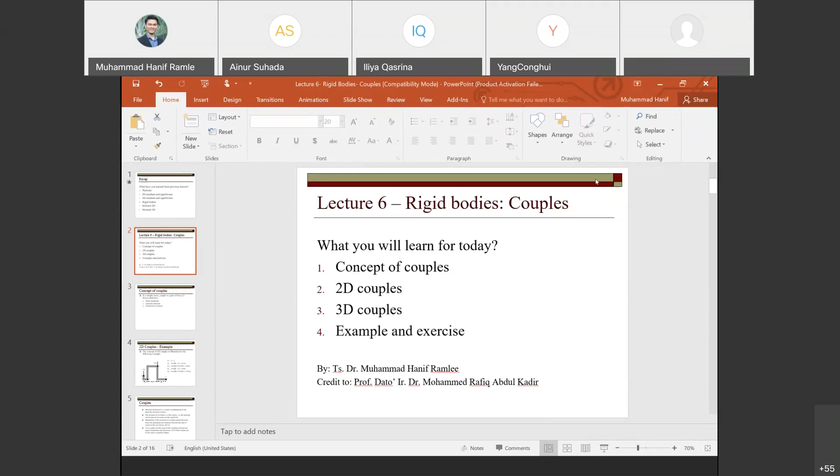Okay, right. Okay, Bismillah. So how was your test actually?

Testing. Alhamdulillah, doctor, it was good. Oh okay, only Hussein good. How about others? Easy? Easy, right? Yes, doctor, thank you.

Okay, so I think you can score 100% for test one. Is it? Can you solve, doctor? Inshallah. Okay. Inshallah.

Wong King Tong says he cannot solve the last question. Okay, alright, never mind. I will explain why I put question 4 later on after I mark your test 1. So once the mark is ready, I will pass it to you, and then I will explain why I put question number 4. Let me check.

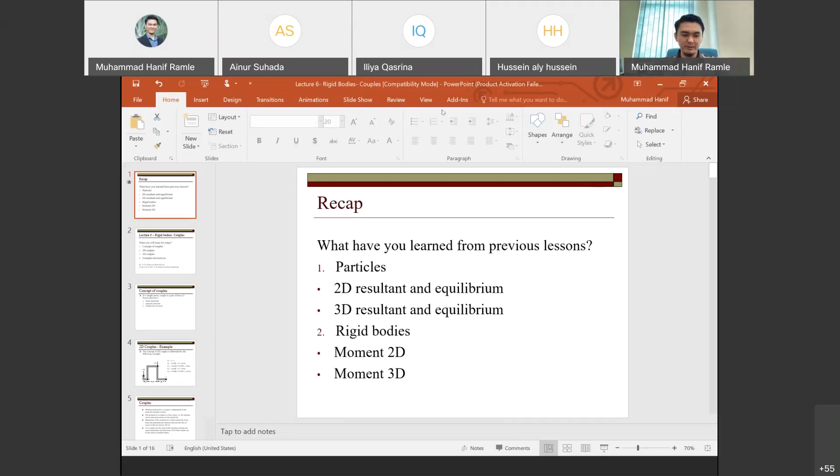Okay, all right, so let's start with the lecture. Just want to know what you have learned from the previous lecture. So maybe before we start the new topic, I just want to know what you have learned from the previous lesson, from the previous lecture. So actually, what have you learned?

The 2D and 3D equilibrium. Okay, all right, any more? Moment of particles. Okay, any more?

Any more? What have you learned, guys? 3D moment, and we take some examples, we solved some examples. Difference between a particle and a rigid body.

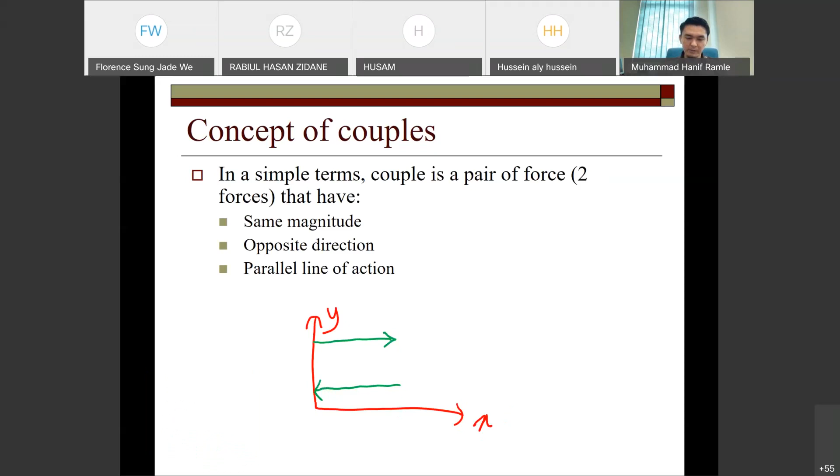Okay, if you have two forces that have the same magnitude, let's say 10 Newton here, 10 Newton here, opposite direction to each other, the upper one going right, the below one going left, which is opposite direction, and parallel, both of them are parallel. This is the system that having couples, the system having couples.

So let's say we do have these forces, one is like this, say 20 Newton, and another one like this, 20 Newton. Is this considered as a couple? No. Okay, great, very simple, right? Very simple.

All right, why do we learn couple? Later on, if you go through a lot of examples, you will know why we learn couple. Basically what I want to tell you is the use of couple is that you can calculate moment about any point that you like, because the calculation, the final answer will be the same.

Let's say you want to calculate a moment about point A, for example. Then you calculate using the formula, you will get the answer like shown here, 400 Newton meter. Let's say you want to calculate moment about point B, you calculate using the normal formula, you will get the same answer. And then you calculate a moment about point C, you will get the same answer. And the last one, moment about point D, you will get the same answer. So the thing that we learn about couple is just to show you, any point that you calculate for moment, the answer will be the same if the system has a couple.

If the system has two forces that have different direction, same magnitude, but in parallel, and parallel position, right? So if you want to try, you can try now.

To calculate a moment, for example, about this point A. If you choose point A, you will only consider this force in your calculation. Let's say clockwise is positive. So it will be equal to 100, distance is 4, equal to 400 Newton meter. So this other force we're not considering if you choose point A.

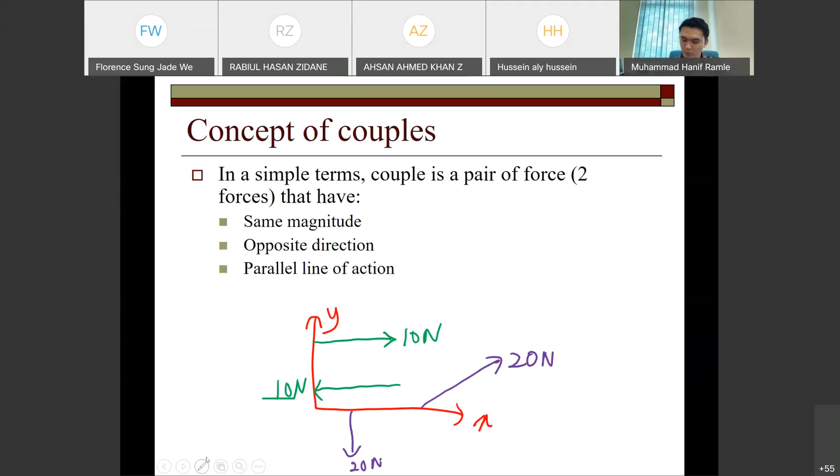So far any question? Why for MB we added, but MD we subtracted? You cannot simplify and just put sign positive or negative like that. You have to understand how to get the answer, how to get the solution. Never mind, I can explain to you. It is all.

Let's say you want to calculate a moment about point B. We go one by one. We take this point, and of course we have to simplify the equation. We have to assume the first direction - I assume the positive one should be clockwise, like this. So any force that follows this assumption will be in positive direction. We have the first one, which is this force, 100 times 1, and then plus another force, which is here, 100, distance is 3, and we will get the answer.

So if you go to point C, we only consider one force because the C point has another force, 100 Newton, so there is no distance at all. So we can consider the moment for this force is equal to 0. So for point C, again, assumption positive should be clockwise, equal to 100 times distance. You will get 400 Newton meter as well.

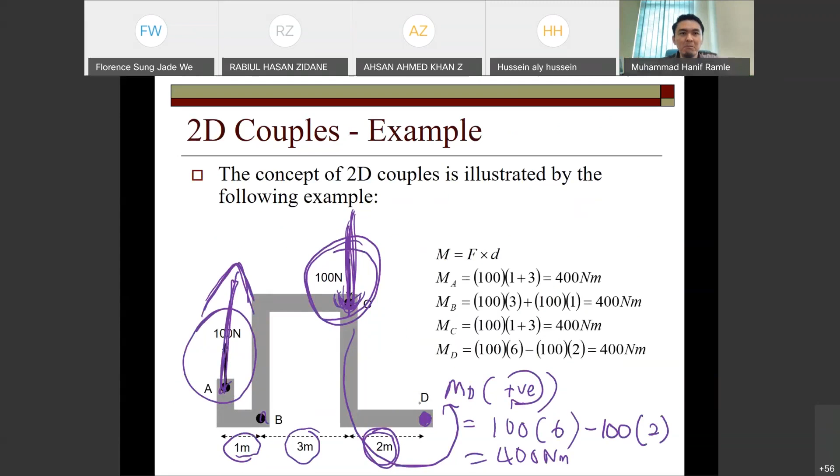If you have a couple, it is independent. No matter where you choose the point A, B, C, D, the moment will be the same forever and ever. So this is the meaning of the first statement.

So number two, the moment of a couple is a free vector, i.e. the moment can be placed anywhere on the rigid body. Do you understand what is the meaning of this statement?

Anyone? Come on, guys. Tak sarap lagi eh? Ke tak sahur? Anyone? It's similar to the principle of transmissibility. No. No. No. Anyone? No idea.

Okay, so the meaning of this statement is actually, the moment that you calculate just now, let's say 400 Newton meter, can be placed anywhere on the rigid body. 400 Newton meter can be placed at any point that you like. If it is a free vector, it's not only the point.

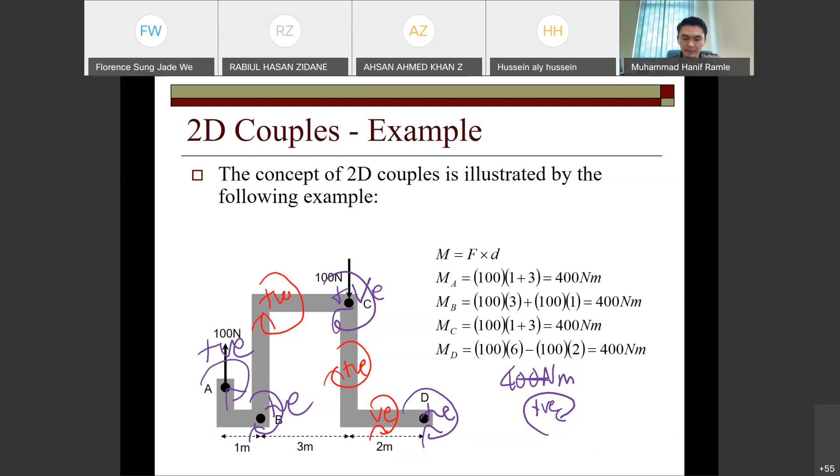Okay, so this is the meaning of the second statement. The moment of a couple is a free vector, where the moment can be placed anywhere on the rigid body.

Okay, so number 3, the magnitude of the moment of the couple equals the force times the perpendicular distance between the line of action of the two forces. As you know, we have this equation, M equal to F times D. The magnitude of the moment of a couple actually follows this equation.

And then number 4, two couples are the same if the resulting moments are of equal magnitude and direction, and both couples are on the same or parallel planes. So the last statement, do you understand? Yes, doctor. Okay, can you explain to everyone?

Who said yes just now? Rabiul. Rabiul Hassan, did you say yes? Yes, doctor. Can you explain your understanding of that statement? No, doctor. Sorry. I understand, but I cannot explain. Okay, all right.

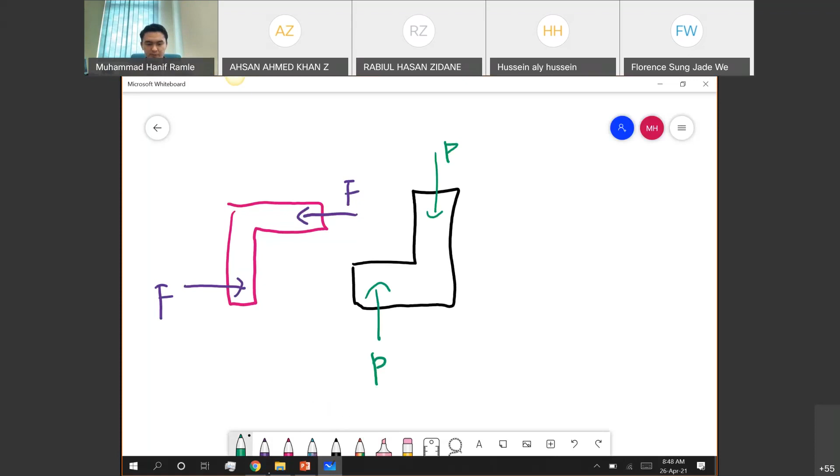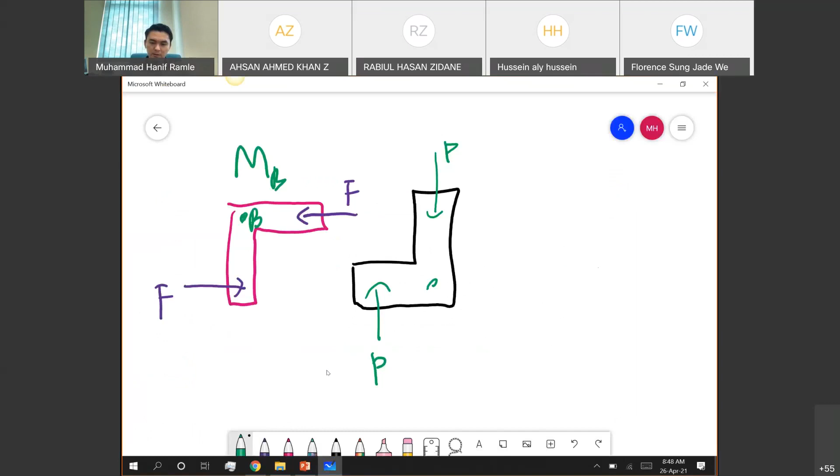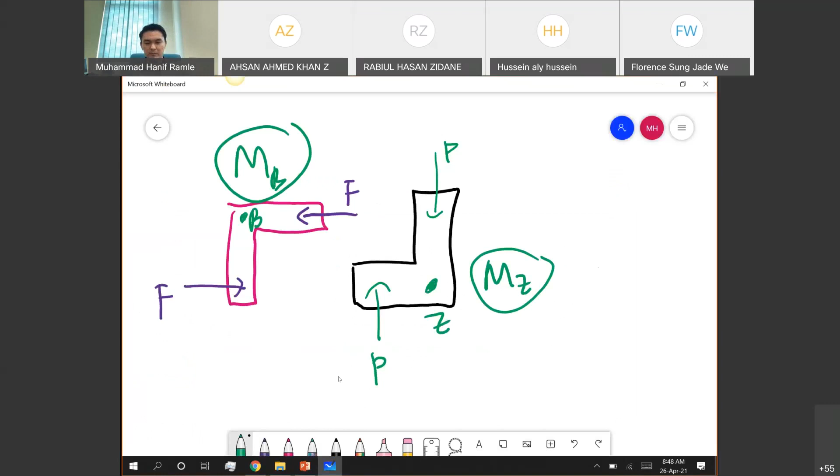So if you have this system, 2 different rigid bodies with 4 forces, you will find that the 2 couples having moment are the same. So the moment about this point B, and say a point Z, the moment about point Z, will be the same. These 2 will be the same. The 2 couples are the same if the resultant moments are equal.

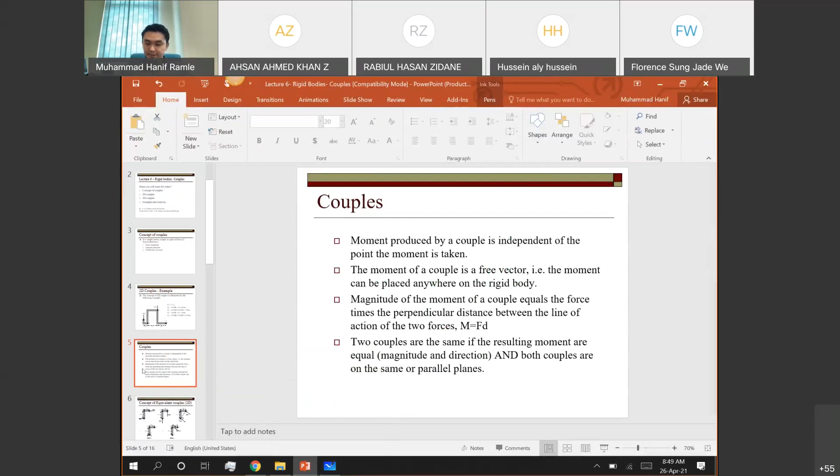So let's proceed to the next one. Concept of equivalent couples in 2D. You can transform the forces into a different direction, into a different magnitude, like this. Let's say the original is here, and you want to solve a problem without this kind of direction. You can transform this direction into this one. How to transform?

The first thing you have to calculate is the moment, of course, about any point you like. Let's say I take moment about C, the easiest one. You will get straight away negative 90 times 3, which is negative 270 Newton meter about point C. So once you have this moment, 270 Newton meter, you can transform the forces into a different direction as shown here.

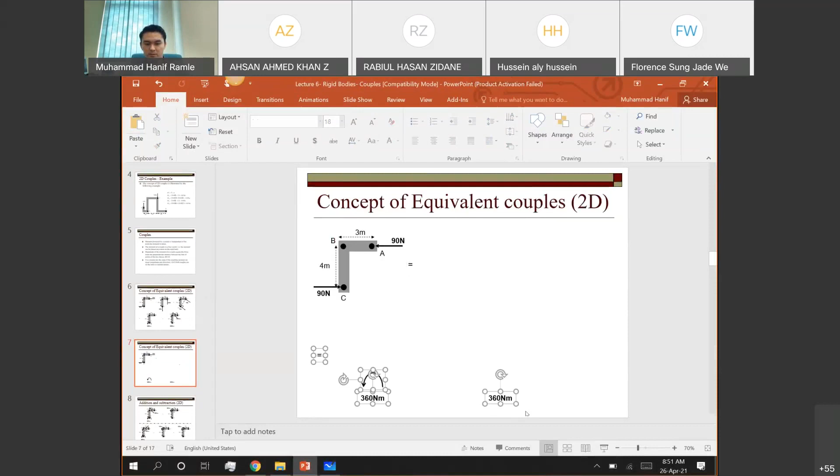How to transform? Any idea? Anyone? How to transform? Someone? Come on, guys.

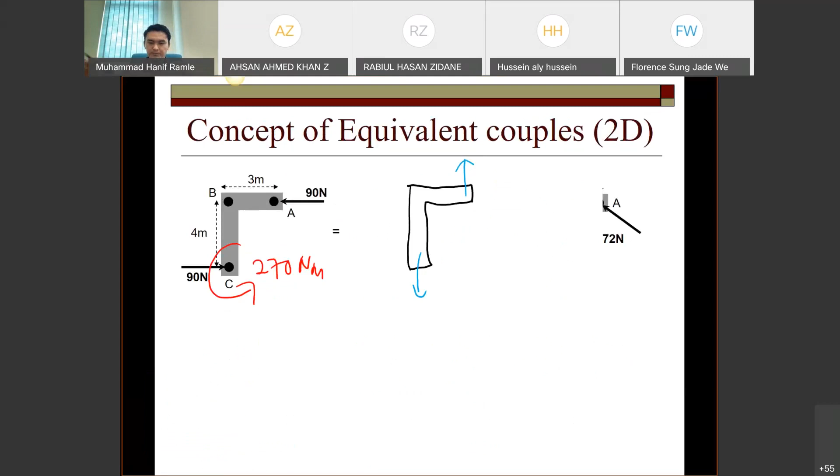One condition is sure, that we should get a resultant of 270 Newton. At point C, if we change the force, we should still get 270. That is one condition, I think. I'm not sure, but at point C, when we change the force, we should still get the resultant as 270. The resultant or the moment? The moment, sorry. Yeah, correct. So the moment will be the same, but the direction will be different, and also the magnitude.

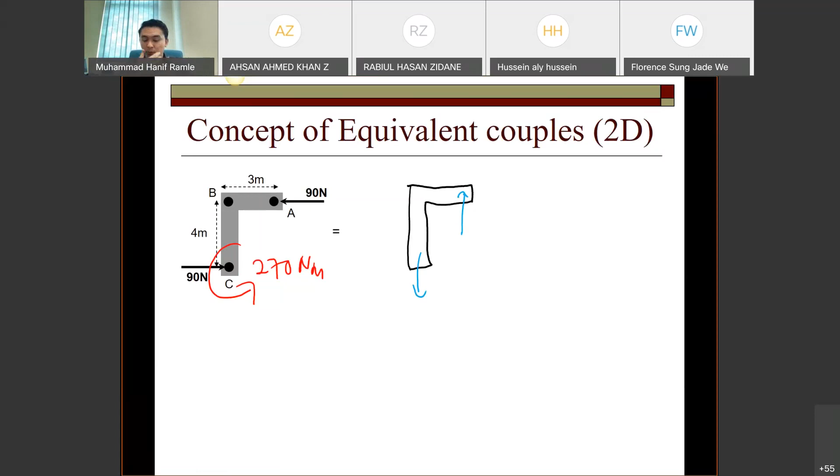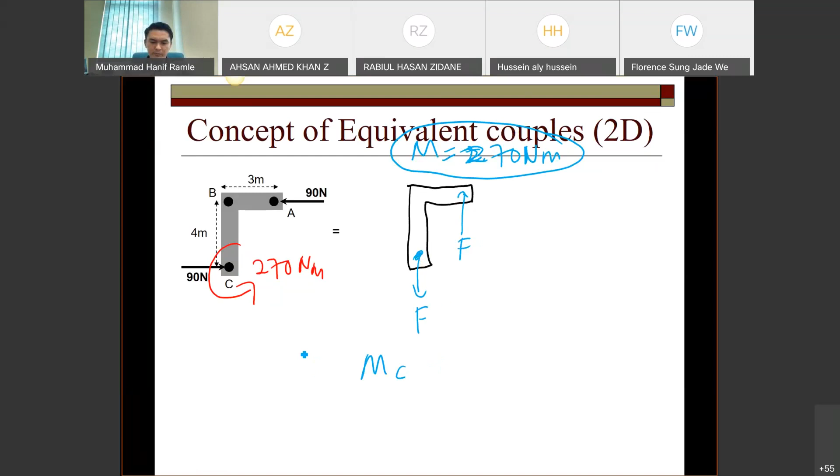If you change the direction like this in the blue arrow, this system has the same moment actually. You can find the forces using this moment. Let's say I call it F. You can find the F value using this moment, using the same point, C. I assume positive is clockwise. So in this situation we have negative F and the distance is 3, and the answer is negative 270. You will get it straight away.

Okay, how much? This one. Again, 90. Same. Negative 90. Oh, sorry. Sorry. This one is a mistake. It should be 270. Right. 360. This one should be 360. Am I right?

Can someone check? Right. Can someone check for me? Guys? We take the distance between B and C, then it should be 360. Okay, great. So the answer for this one should be...

So normally which distance should we take? Like 3 meter or 4 meter at point C? Hey, this moment. Wait, let me explain. Okay.

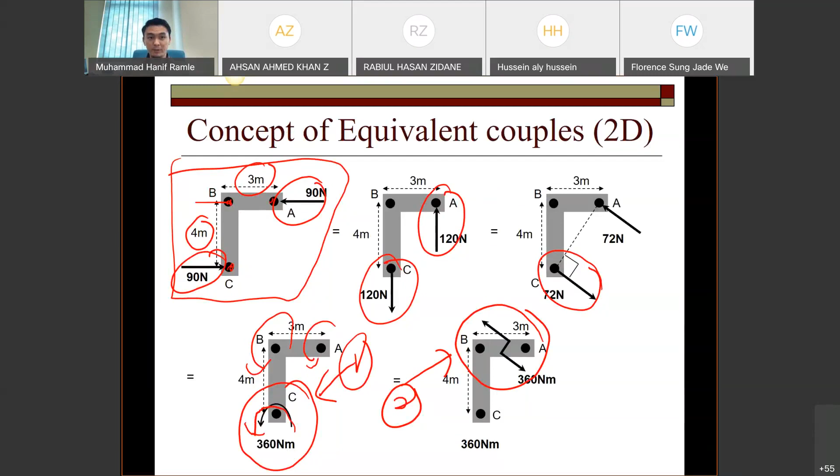So another thing that I want to show is the arrow to illustrate the moment. The first one is this one, the second one is this one. You can illustrate this kind of arrow to show the moment direction. So this arrow, you can put at any point that you like, as we discussed in the previous one. Where is it? Yeah, this one. You can put any point that you like because the moment will be same if you have a couple system. And this example only put it at C point.

Another type of illustration of moment, like this arrow. Yeah. This one if the rigid body having anti-clockwise direction. So if the body having clockwise direction, the illustration of direction should be like this. Right? Sorry. It should be like this. Or it should be like this, of course, if the rigid body is clockwise direction. All right. Any questions so far? Any question?

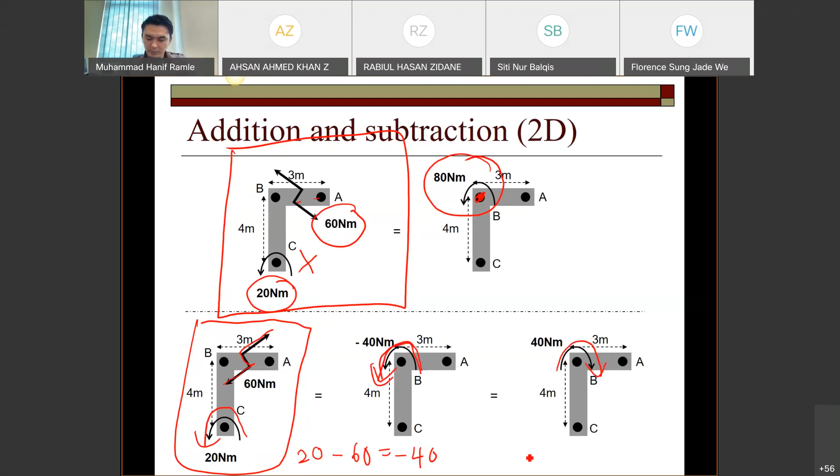So the second example is here. Different direction. The first one is anti-clockwise, which is 20 Newton meter. The second one is 60 Newton meter, but in clockwise direction. So let's say you want to have this direction, you can add or subtract like this: 20 minus 60, so you will get minus 40. Or maybe you want to have the clockwise direction, you can have minus 20 plus 60, so you will get 40 Newton meter.

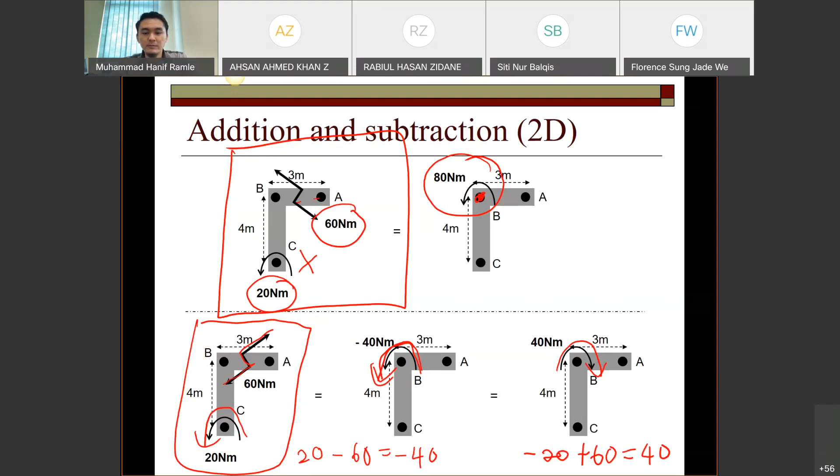Okay, do you get, guys? Easy, right? Yes, doctor.

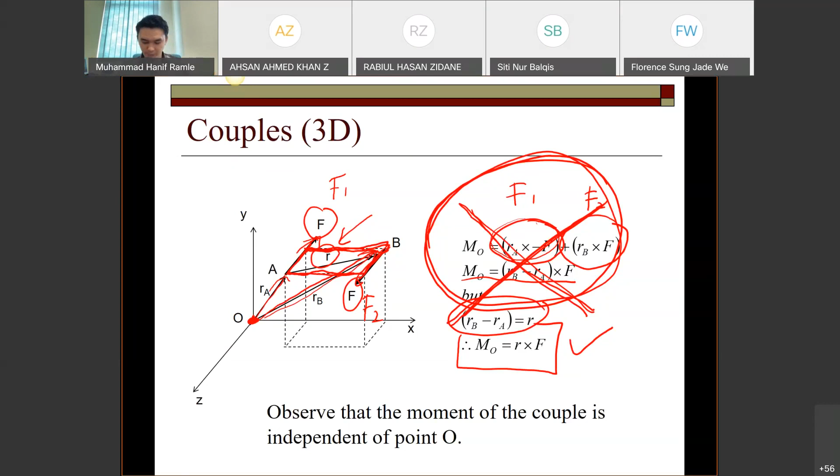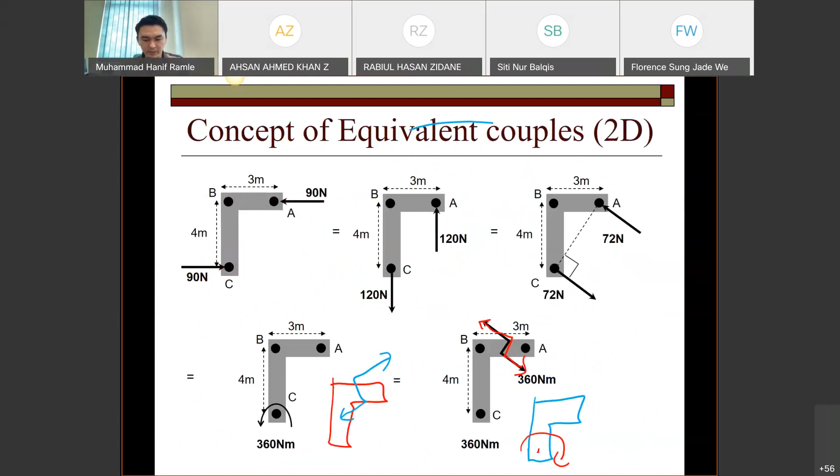Before we proceed to the example, is there any question? Is there any question, guys? Any question? No, doctor. Can I proceed? Yes, doctor. Okay, great. Let's proceed.

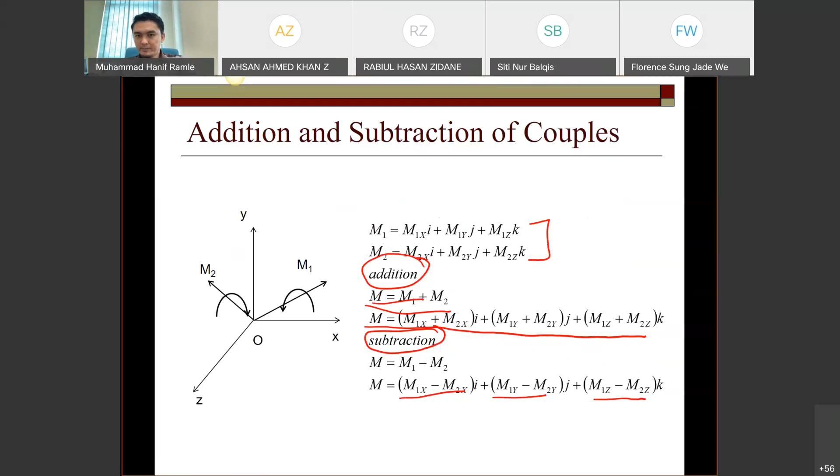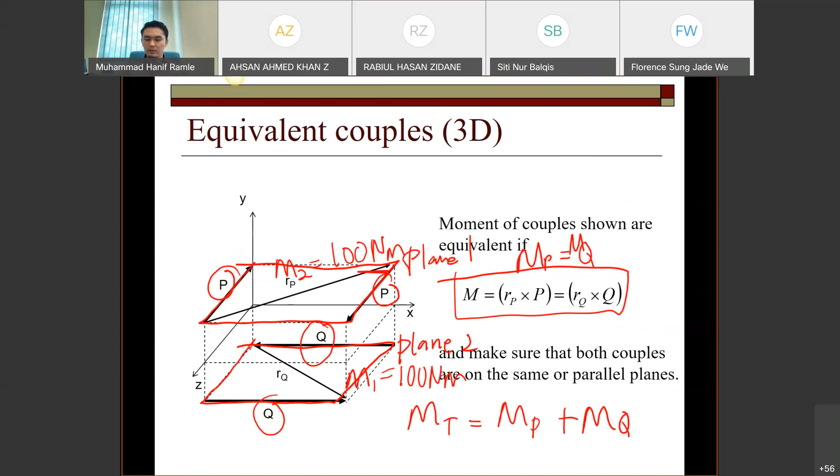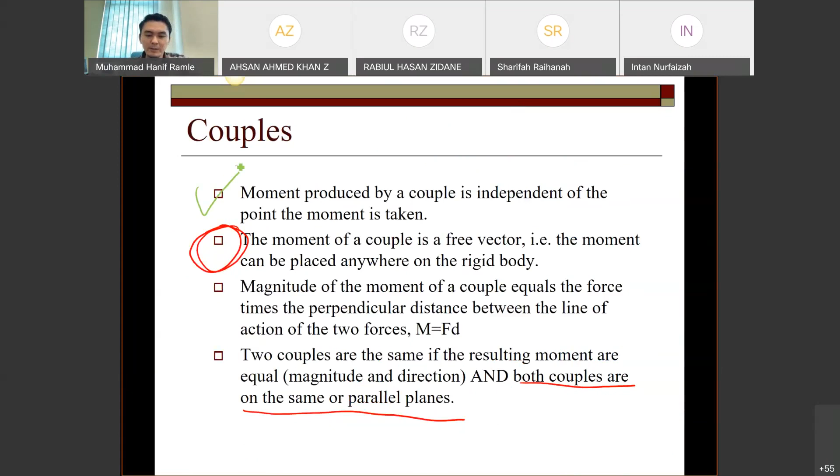So basically, you can take whatever point you like. Let's say here, for example, because the moment at every single point here will be the same. 5.4J will be the same. You can take any point you like, as I mentioned in the previous slide. Okay, this one. The moment of a couple is independent. So you can take any point you like.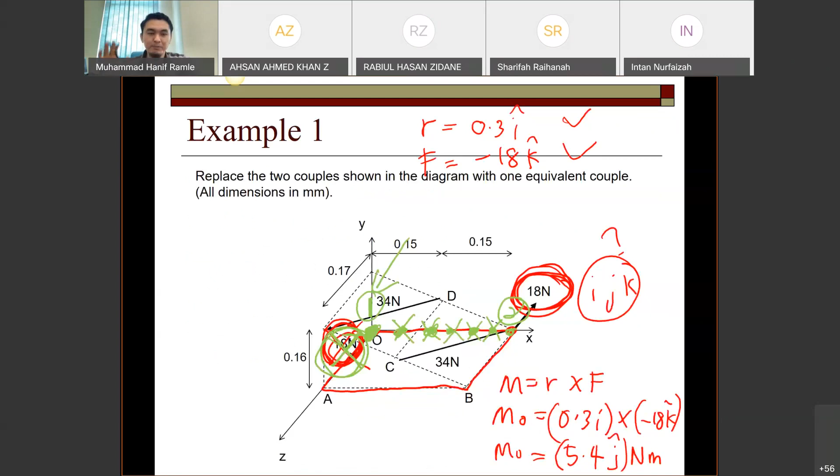D should be perpendicular. From this one, the force is like this, meaning there is no D from the line of action to the point; D is equal to 0. So that's why we can eliminate this force, and we only consider this force in our calculation. All right. So if I choose the second point, let me erase this one.

Okay, if I choose the second point here, point number 2, you can calculate moment as well. Let's say this moment I put it point E. If you choose this point, you will not be considering this force in your calculation. You only have to use this force in your calculation, and the answer will be same as this one.

If you don't trust me, we can try now. So if you calculate moment about this point, point E, R cross F. So F is only this one, in the direction of Z should be positive. F equal to positive 18 K Newton, and the direction should be from E to O.

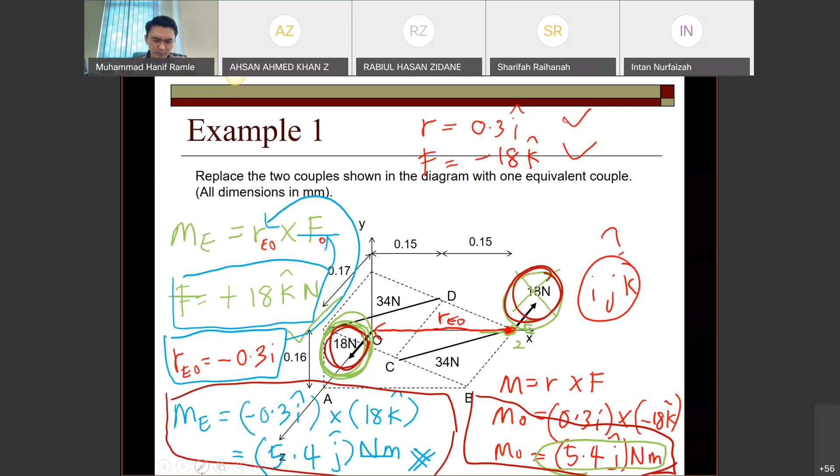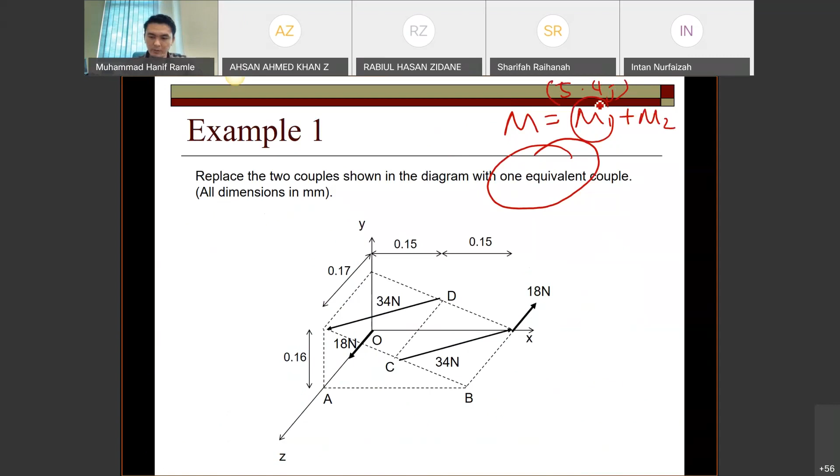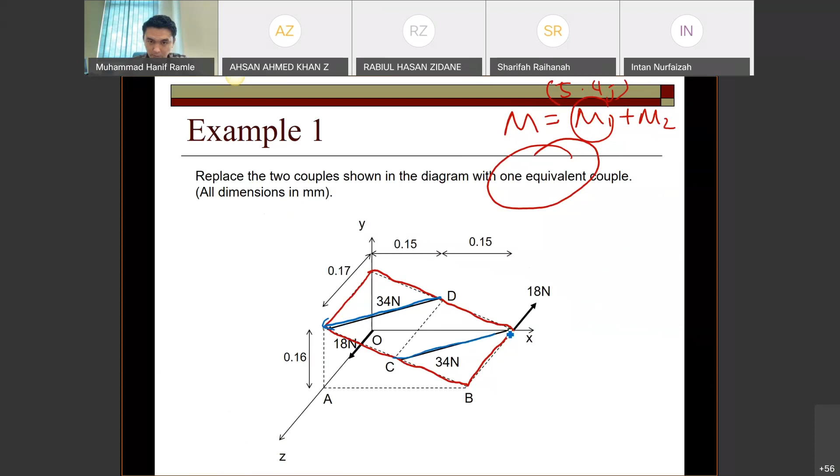Since we have to find the equivalent couple, which is M, so M1 plus M2. M1 just now we get 5.4 J. So moment number 2 is for this plane, and this plane having a force of 34 Newton, from this point to this one. Same goes to this plane, you have to utilize this equation to find a moment.

So how to find a moment? Let me pick one name. Chai Yi Wei, are you still with me? Yes, Chai Wei, can you tell me how to find the moment? Of course, you have to get the R and F. Can you tell everyone?

This one is a bit tricky. Everyone, please prepare the answer, I will ask you also. Chai Wei Yi, which point that you want to calculate moment about?

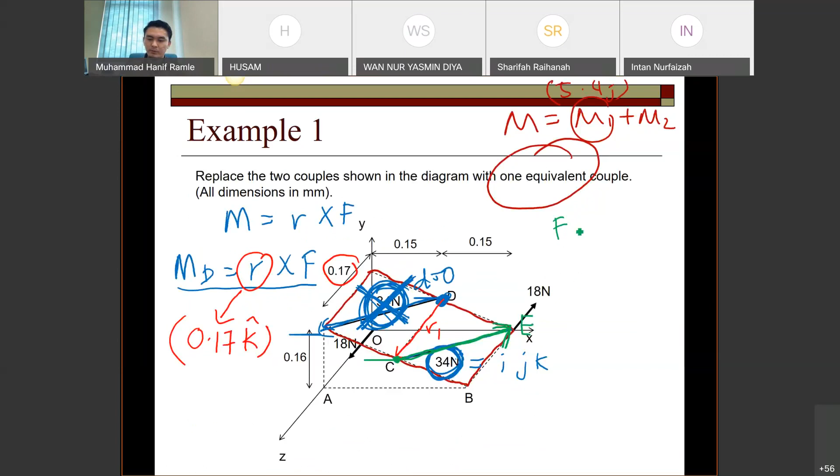The force should be F lambda, where lambda is the direction: dx over d, I, plus dy over d, J, plus dz over d, K. So you have to identify dx, dy, dz, and of course d.

From this case, what is dx? 0.15, 0.15. Negative or positive? Positive, because it's in the right. Correct, 0.15.

Okay, how about dy? Dy positive also - wrong. Dy should be negative. How much dy? Yes, correct, negative 0.08. Okay, how about dz?

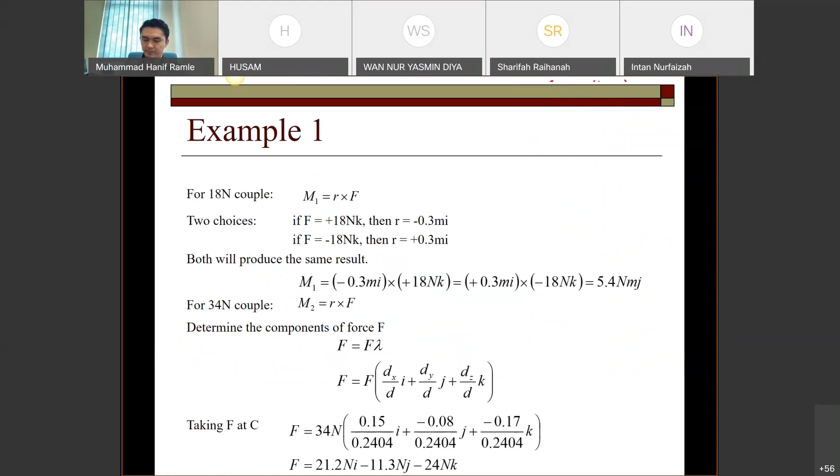Yes, correct, Vilina: negative 0.17. So how about d? Can someone calculate for me d? 0.24. Okay, you substitute all those information in this formula.

F is 34. You will get the answer in terms of IJK form, and the answer of force in terms of IJK form is 21.2 I, please check, minus 11.3 J and 24 minus 24 K, Newton.

Okay, right. Please check the answer. So once you have R and F, substitute into the equation, you will get MD straightforward. Using the cross product, you will get MD.

1.921 I plus 3.604, for example, I'm using 3 decimal places. Let's say in this example we use 3 decimal places, for example. You can use 2 decimal places, as I mentioned to you.

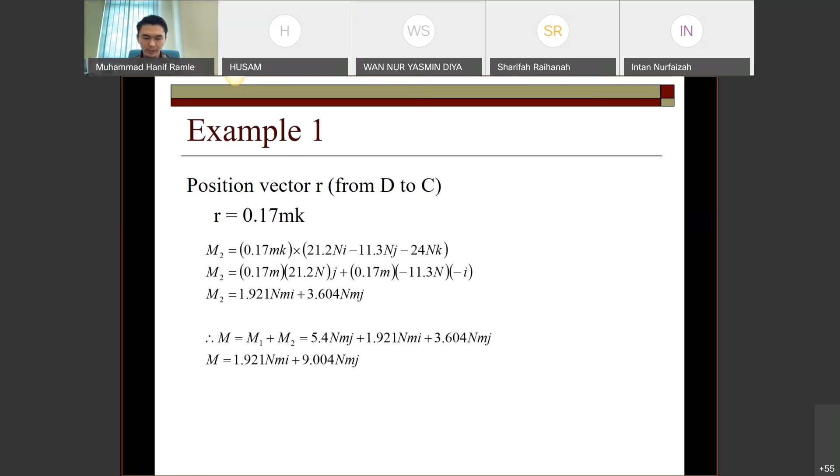This is the thing that you have to know: if the question asks you to find one equivalent couple, meaning that the simple word is that you have to find the moment, the total moment. Any question? Do you understand?

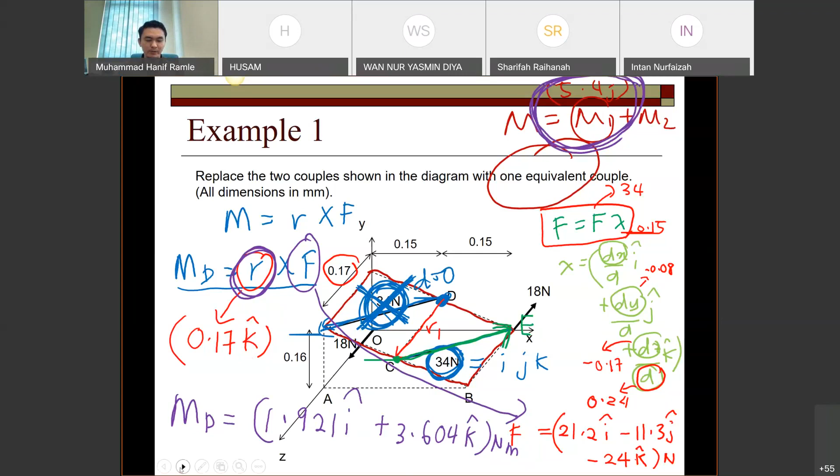Okay, last slide. It is about the force couple system in 2D. As I mentioned to you just now, you can transform the force into a different position, a different direction, and magnitude as well.

If you have the couple system, this is the force couple system 2D. You can move a force to a different location. Let's say some cases you want to study about the prosthetic leg, for example. You don't want to put the force at O, you want to put the force at A, for example.

But of course, the initial force is at the O position. Maybe you don't want to have the force at O. You can move this force to A using force couple system.

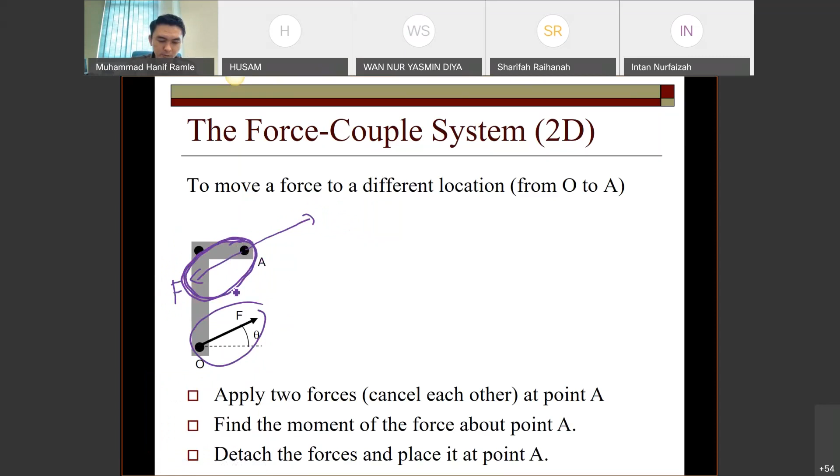And the idea is that you have to introduce a couple like this. As I mentioned to you, we cannot simply introduce this force, because the original system doesn't have this force. So in order to make an equilibrium, a static, an original figure, the original system, we have to use this additional force as well, reaction and action. That's why we have this one, this couple.

So if you can see this statement: apply two forces, cancel each other at point A. Two forces at point A, so this one can cancel each other. But because we want to have a couple, then we just simply put it like that.

And then this next step, this couple has the perpendicular distance. You can get a moment later on. So in the end of the day, if you use couple, you will get a moment like this, and also the additional force at A.

You calculate the couples, which is moment, for both forces. You will get a moment here. So this is the thing that we can move a force from one point to another point.

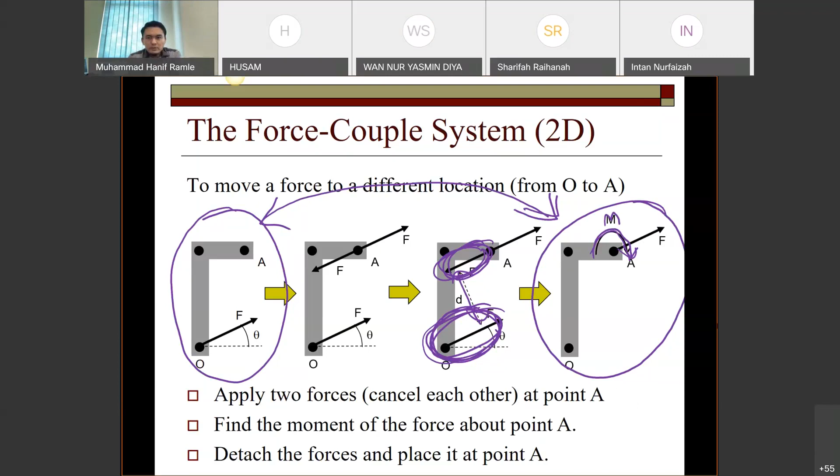Do you get the idea? Guys, do you get the idea?

Does the two forces have to be the same magnitude as the original one? Yeah, it should be the same magnitude. It should be same magnitude.

Any more question? Any more question? Alana, Elise, Mariam, do you understand?

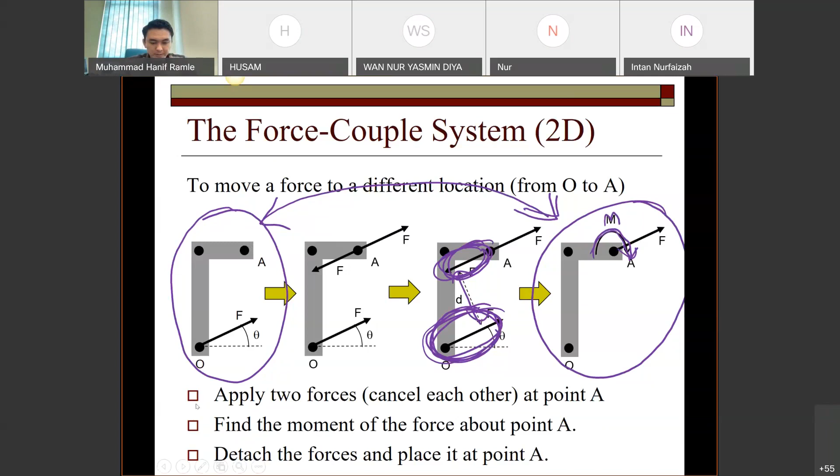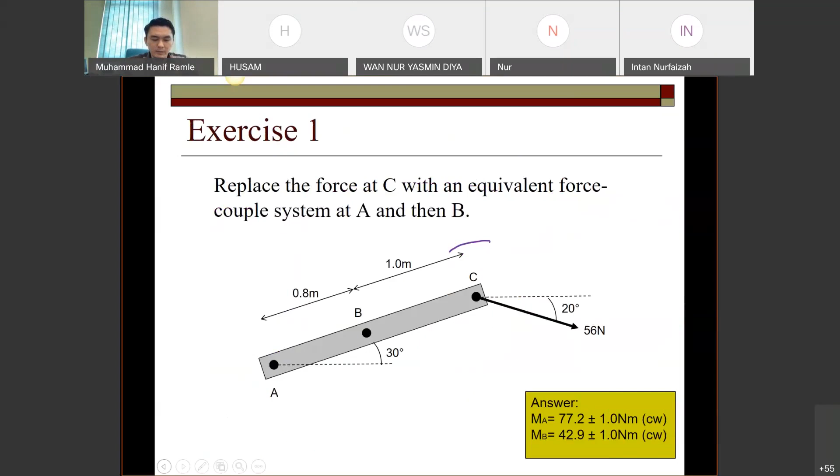Okay, if no question, so I'll leave it to you to do this exercise one first. Later on, we will discuss the solution in the next class on Wednesday. Also exercise 2, I'll leave it to you to do the exercise first, and then we will discuss the solution in the next class. Are you okay with that?